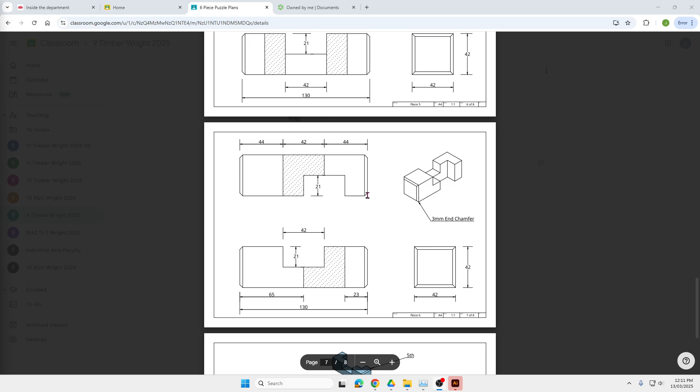In this video, I'm going to demonstrate the basics of utilizing the skills we've learned in Onshape, watching some of the previous videos, to actually draw a project. The set of plans on screen was generated for the 6-piece puzzle using Onshape. We're going to utilize these plans to draw each individual piece of the 6-piece puzzle in Onshape, which will allow us to make this assembly, and we could then generate a set of plans. This video is about how we can use the basic tools in Onshape to draw individual 3D pieces. I'm just going to demonstrate the first two pieces to get an idea of how we could use Onshape to do that.

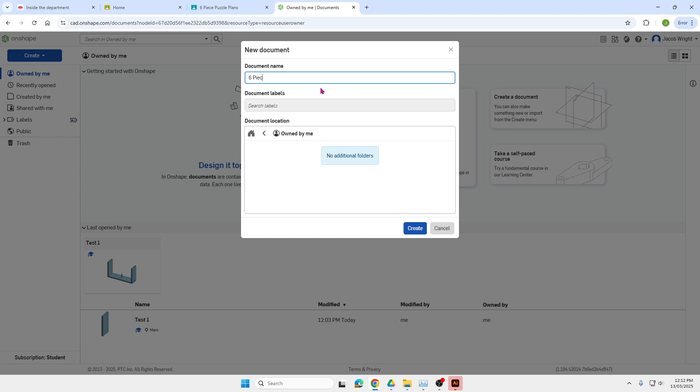So on the home page of Onshape, we're going to create a new document. We're going to label it with a title, so I'm going to call it 6-piece puzzle, and click on create. Once it's loaded our new document, which can take a bit of time sometimes, we're now ready to start drawing.

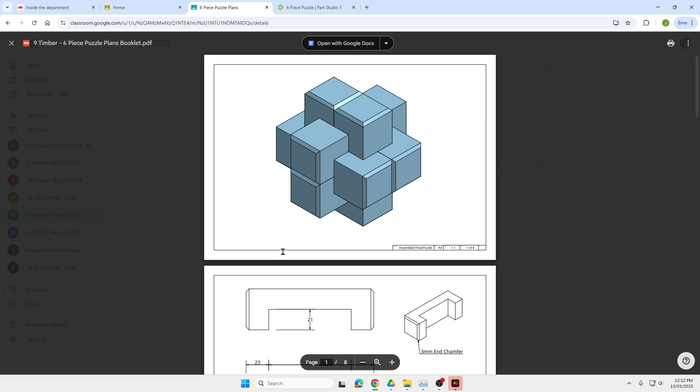Now the beauty of a 6-piece puzzle is all 6 pieces are exactly the same dimensions to start with, and then we remove the individual cutouts from each piece. So what we're going to do is draw that initial square prism that each individual piece is. If I go to the plans, I'm going to need a few dimensions to start with.

In these plans, I'm just going to hover my mouse over a couple of views. At the top of the page here, that is the top view. Where my mouse is now, that is the front view. And over to the right here, you can see the end view. Now we need a few key dimensions.

We're going to need to know how long each piece is. If we look down the bottom here, each piece is 130 millimeters long. And if we look at this end view, each piece is 42 millimeters wide and 42 millimeters thick. So we need those 3 dimensions to draw our basic square prism for each piece.

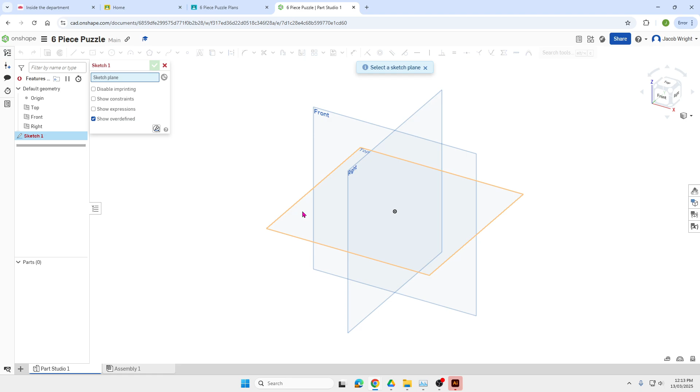So if I go back to Onshape, I'm going to start off with a sketch, and I'm going to pick a plane. I'm going to pick the top plane. So looking at my top view here, this is essentially what it's going to end up looking like. I need a 42 by 130 millimeter rectangle to start with, because we always start with a 2D shape and then we're going to make it 3D.

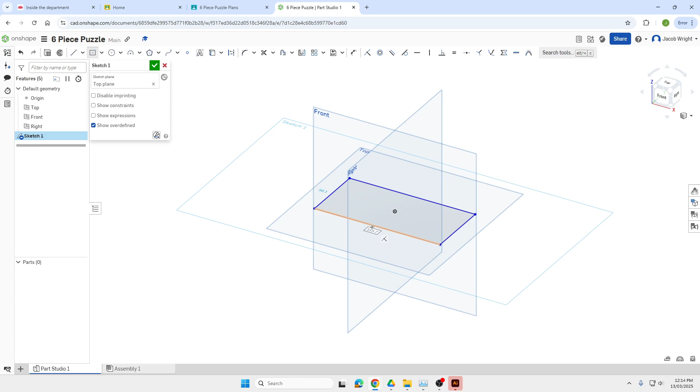Using my rectangle tool, my center point rectangle, I'm going to click in the center and start to draw out a rectangle. Remember, from the plans, it needs to be 130 long, so I'm going to type in 130, press enter, by 42 millimeters back, so I'll do 42 and press enter. And then I'm going to accept that sketch by clicking the tick.

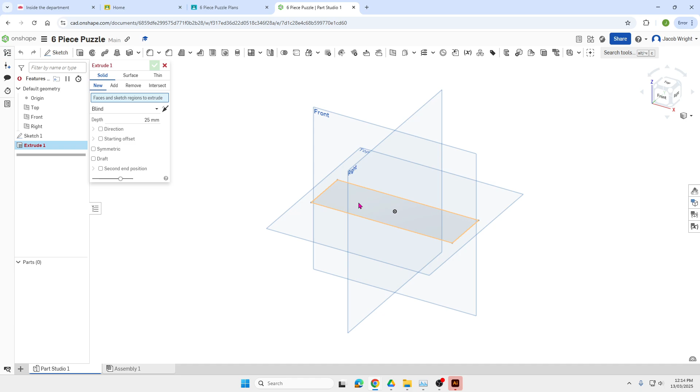Now I need to turn it into a 3D shape. So I'm going to select my extrude tool and click on that shape that I've just drawn, the rectangle. All I need to do now is decide how deep that shape needs to be. Remember, from the plans, it's 42 by 42, so I'm going to need to change that depth to be 42, and I press enter.

So what I've drawn now is the basic piece for all 6 pieces of the 6-piece puzzle. Now before I go any further, because I just need that exact piece for all 6 pieces, I'm going to do a little bit of a cheat, and duplicate this part studio so that I have 6 copies of it that I can then go on to modify. So I put my mouse over the top of this part studio down the bottom here, right click on it, and go to duplicate. If I click on duplicate, it will make an exact copy of it right next to it.

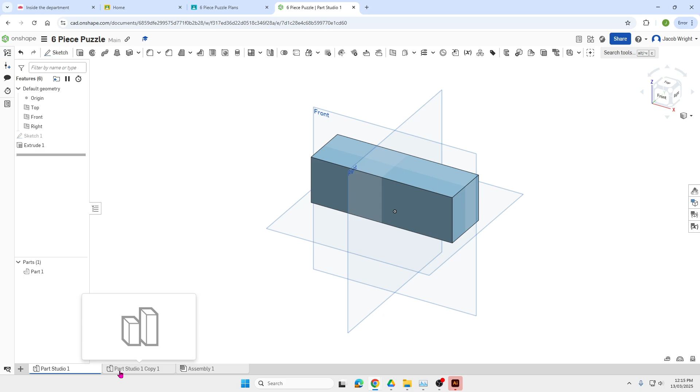I need 6 copies as it's a 6-piece puzzle, so I'm going to do that 5 times because I already have 1, so I need 5 more. Right click, duplicate, right click, duplicate, and you can see them coming up here. So I've got 1, 2, 3, 4. I need 2 more. And last one. So now I've got my 6 pieces.

Now instead of leaving them as Part Studio 1, Part Studio 1 Copy, and so on, to make them a bit easier to tell what each one is, I'm going to rename them. I need to right click on the piece, click on rename, and call them piece 1, piece 2, and so on. So piece 1, right click, rename, piece 2, right click, rename, piece 3, and so on. I'll do that for all 6 of them until I've got all 6 pieces.

Now that I've got all 6 pieces and done that initial duplication, I can start editing each piece so it looks how it's supposed to and will go together as a puzzle. So again, I'm going to go back and reference the plans. Before I do that, looking at this piece, this is my front and this is my top. It's really important that whenever we're working on these, we've got the view set so that we've got the top facing the top, and then the front facing towards us, and they're our 2 faces that we're primarily going to be working on.

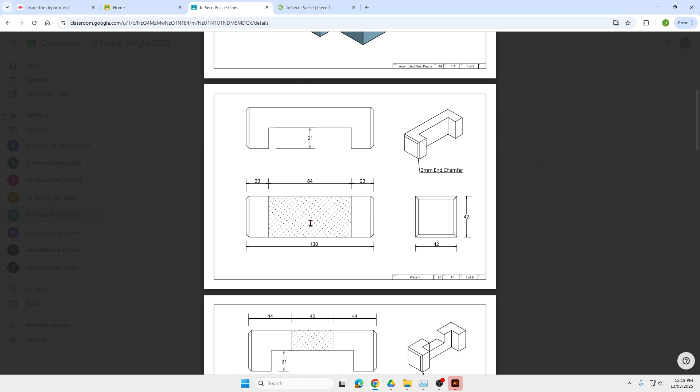So all I have left to do now is extrude or remove this cutout. I'm going to tick the sketch, use my extrude tool, select this rectangle here. I don't want to add, I want to remove, and I want to change my depth. All of the extrusions are always 21 millimeters, or half of our 42 millimeter thickness, and I'm going to accept it.

This first piece is now complete. It looks exactly like it does in the drawing.

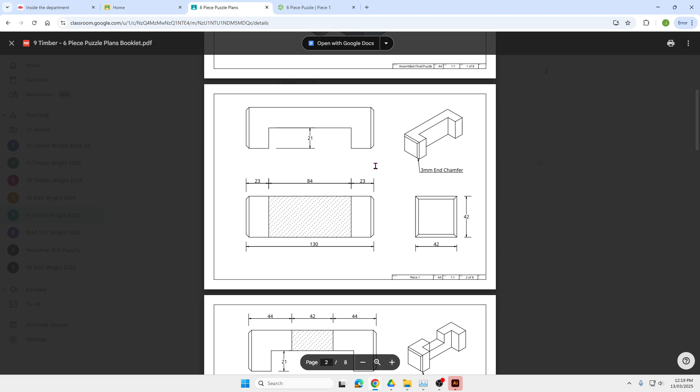Piece 2 has 2 cutouts. So piece 2 has that same front cutout, but it also has a cutout on the top. The front cutout is again 23 millimeters in from each edge.

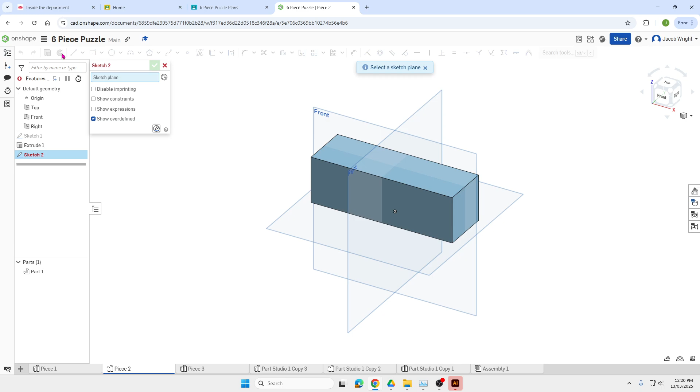So I'm going to click on piece 2 and use those same offset lines. Again, I'm going to sketch, select the face I want to sketch on, use my offset tool, do my 23 millimeter offset inwards for each side. I can then accept that sketch.

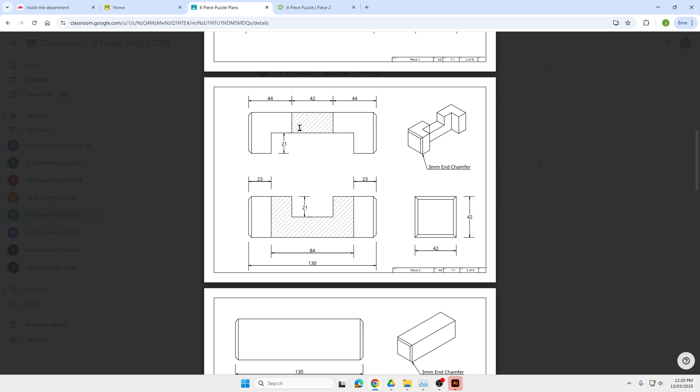Now before I do the extrusion here, I'm going to do the sketch that I need for the top. I had this line and this line here for that cutout. For the top, I need this line and this line for this central cutout. You can see here they are 44 millimeters in from each edge.

So I'm going to go back to Onshape and do another sketch. I'm going to select the top this time, my offset tool, and this time I'm going to come in 44 millimeters from each edge. Make sure my offset is going inwards, so click on the arrow if you need to, then click again, type in your 44 and press enter. Now that I've got both my sketches, I can accept this sketch. I've got my 2 bits that I want to take away.

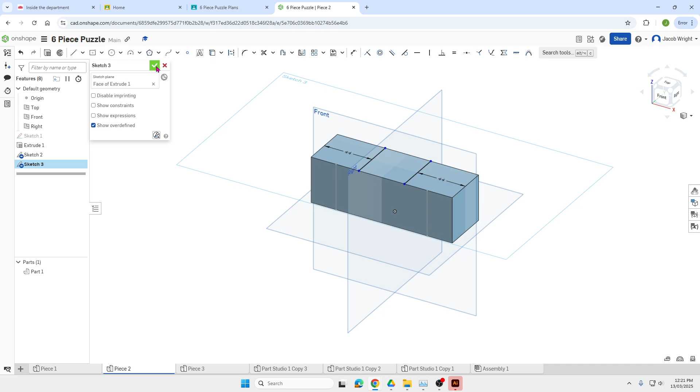I'm now going to select my extrude. I'm going to click on each of those squares and click on remove. Well, apologies, it's not going to let me do them both at the same time, so I'm just going to close it. I'm going to do them one at a time.

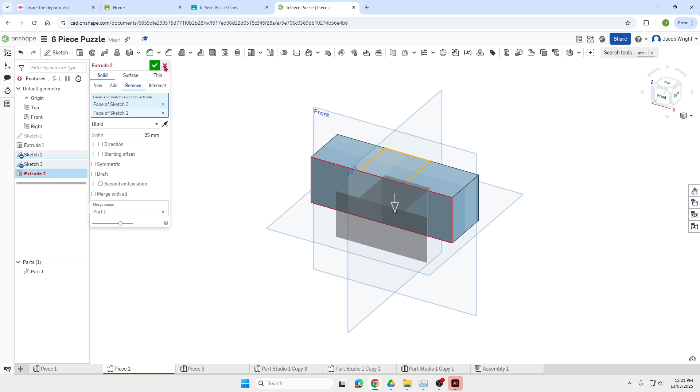So I'm going to click extrude. Let's get rid of this one first. 21, always 21. Tick. Then I'm going to extrude again, select this one, remove, 21 again, and accept. I've now got piece 2.

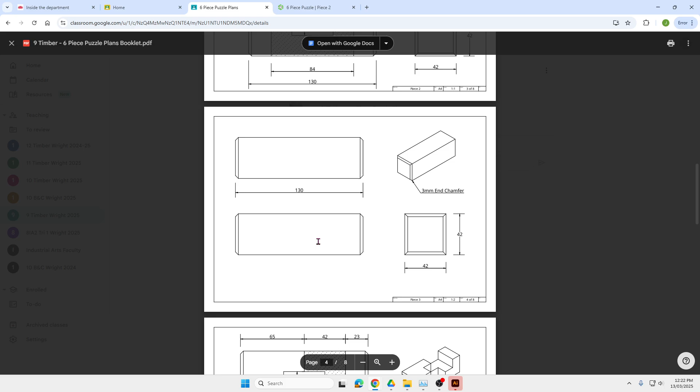Now to continue and do the remaining pieces, it's the same process. We're going to follow the set of plans. Piece 3 is blank, so piece 3 is technically already done. Piece 4, we've got our top view with one cutout, so a line here and a line here that we need to draw onto the top, and then the front has a line here and a line here that we need to draw on, and then we extrude one at a time.

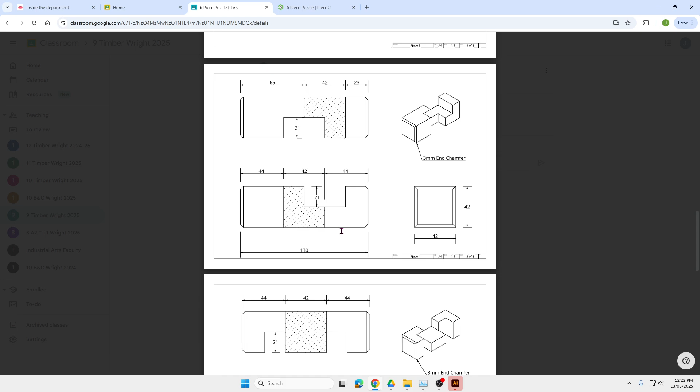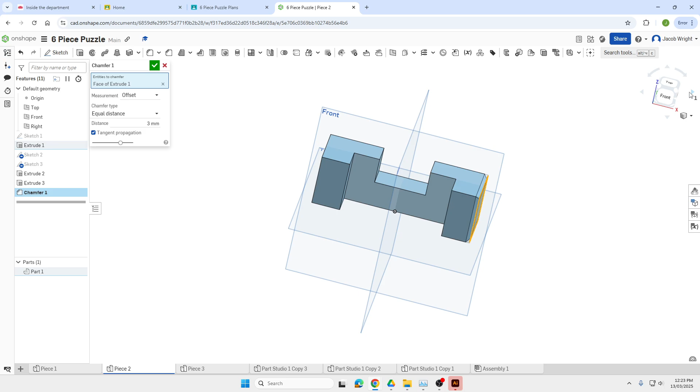The last thing you'll need to do with the 6-piece puzzle to finish it is these 3mm end chamfers. So if I go back to Onshape, if I select along the top here my chamfer tool, I can click the entire square on the end of each piece, then rotate around and select the same on the other end, and it is a 3mm chamfer, so make sure it says 3, click my tick, and I've added my chamfer to each end.

So I'm going to do that. Once I've drawn each piece, I can go back and add the chamfer. We want to make sure we add that chamfer at the end, not before we've done any of the drawings for the extrusions, because we need to offset in from the edge. If you add the chamfer, the offset will be incorrect. So the chamfer is done at the very end once you've completed all of your extrusions on the piece.

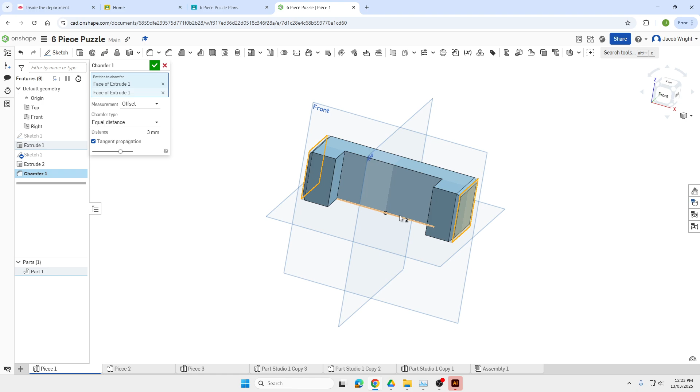And that's the completed 6-piece puzzle once you've drawn each individual piece. I'll do an additional video for how to assemble the 6 pieces of the puzzle together once you've drawn them.